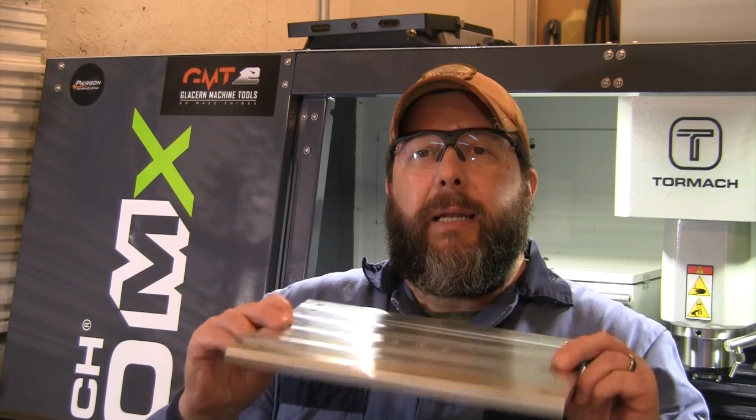Rather than trying to counterbore and drill and put all that through the 1.5 inch, I made up one pallet and I've got this half inch topper plate that I'm going to put on there. It's got dowel pins that align it, and it's got some bolts that hold it down in the corners.

What we're going to do is go through - I've got the bolt pattern for those knife slabs laid out, and all we're going to do is just punch some holes in here. We're going to flip this over on the pallet, counterbore those from the back, and then I should be able to bolt 4 of those handle slabs onto here and run that cycle to get these machined.

I only went with 4. I could have fit more than that on the pallet, but it takes a long time to finish all the contours around there, so 4 is a long enough cycle time. That's still going to save me time, give me a couple hours around the shop to work on things while it's running all those contours.

This operation for this is going to be a lot quicker than that. We're looking at about 4.5 minutes to drill the holes in the top side of this, flip it over, and about a minute or less to do the counterbores in the back side of this. This whole pallet, the rest of it's already ready to go, so it's only going to take us about 5 minutes to make this pallet.

Then we'll test fit, get our pieces bolted on here, and we'll start machining, running that pallet through one cycle to get those contours done and finish those off. Before we get into this, we'll take a quick look at the design in Fusion and make sure you understand exactly what I'm talking about for the holes on here. Pretty quick operation - we'll finish this topper plate, then go back to Fusion, take a look at exactly what we're doing with the handle slabs, and come down here and make some chips.

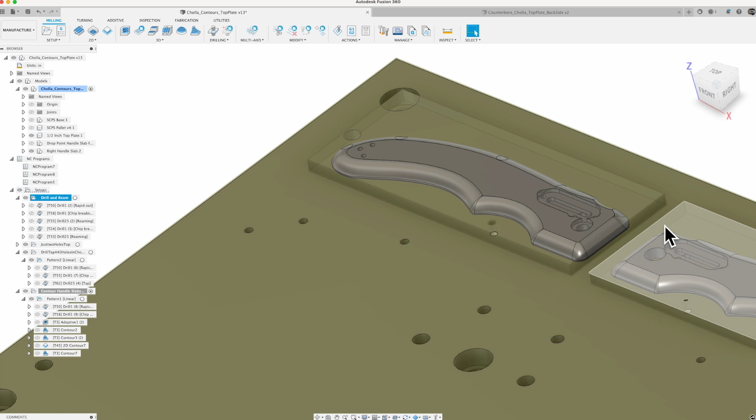After that, you can see where the handle slabs are actually going to fit on here, so we'll get those in place. These other 2 holes I added after, so you'll see where those fit into the design here in a little bit.

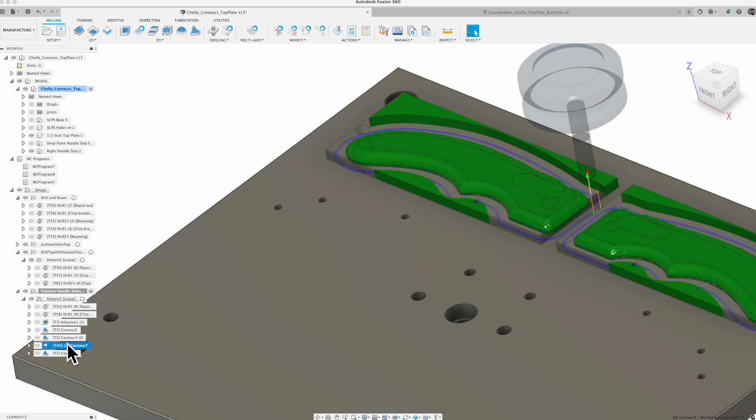But then we're going to go through and do the contours. We'll go around and do a little adaptive roughing around the outer edge, then a bit more on the contours, then clean up the profile, and finally do this very fine finish cut around all of the contours. I did a pattern on there across these 2 designs and then patterned that down. Unlike the drill and ream, where I just did both of them without a pattern, I did all of it in one place. So again, pretty simple pallet. That's the plan. Let's go down there and see how this goes, knocking it out.

All right, well, now that we've seen what we're making, here's that actual Pierson Pro Pallet. This is the 1.5 inch thick piece. You can see I didn't want to be trying to counter bore and bolt those little tiny pins right through this, so that's why I went with this top plate design.

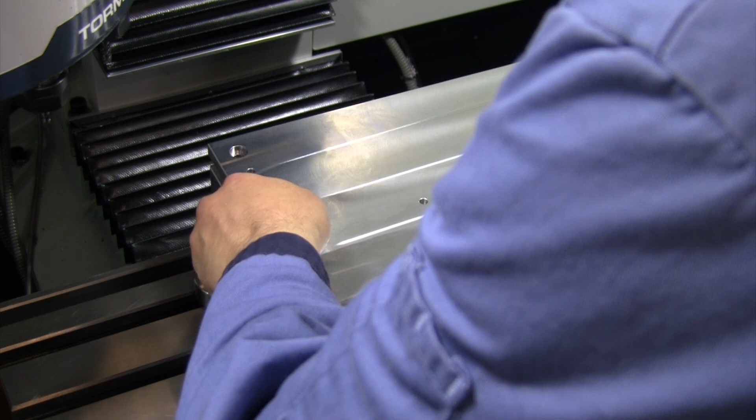And I made multiples of these top plates so I can use multiple different fixtures and holding, so it lines up on those dowel pins. I've got 6 of them on there. It's pretty good alignment. All right, we've got that down on there, and we've just got some stainless bolts here to get those locked in place.

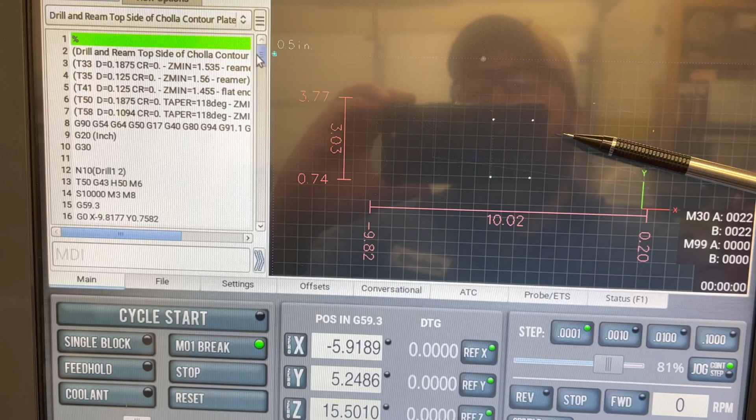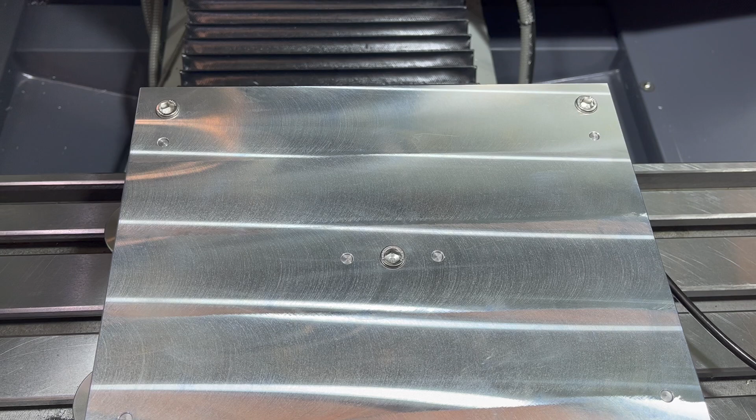All right, I actually had to spin my pallet around here one time. I forgot that I had marked these in the corner, so I made sure I got them oriented the right way. This is the first one of these that I am finally finishing, so make sure I get it on there the right way, get it bolted in place, and we'll be ready to move on and start our program.

All right, we've got our file loaded up in here. We can see a preview of what we're going to put on here for some holes. You can sort of see the other ones coming across there for the bolt holes, so we get enough for 2 sets, or 4 pieces altogether.

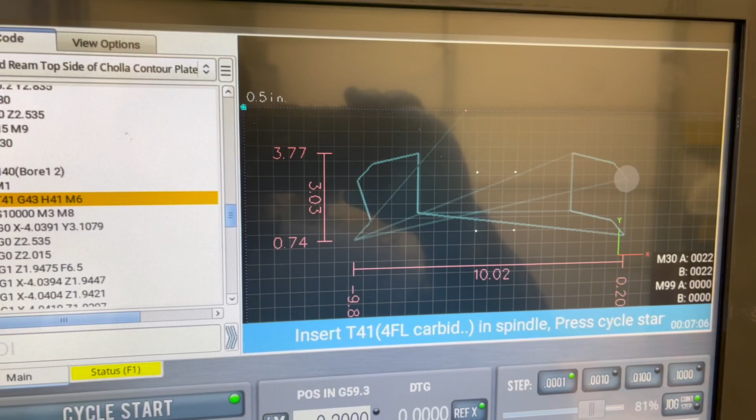I use the same single point of origin on here, so G59.3 is my work position for that pallet system. You can see that I've got this set up for G59.3 on that file for the program. It's only a few tools on this one. You saw that we got it all bolted in there. Like I say, it's only going to take about 4.5, 5 minutes to run this, so it should be a pretty quick cycle.

All right, well, I hadn't done that before. I actually did not keep track of my tools properly when I was loading up the automatic tool changer. I had 41 in there, and then I put in one of my drill bits and took out tool number 41, not realizing I took out a tool that I needed. So it just stopped the program and it's manually asking me to insert that. So I just put in the tool, it's gonna run.

I turned on the M01 cycle break so that when it goes to change the tool after that, since it has no place to store it, it's gonna ask me to remove it before it continues, but I went ahead and turned on that cycle break anyway. First time I've done that, just thought I'd drop that in the video, kind of interesting.

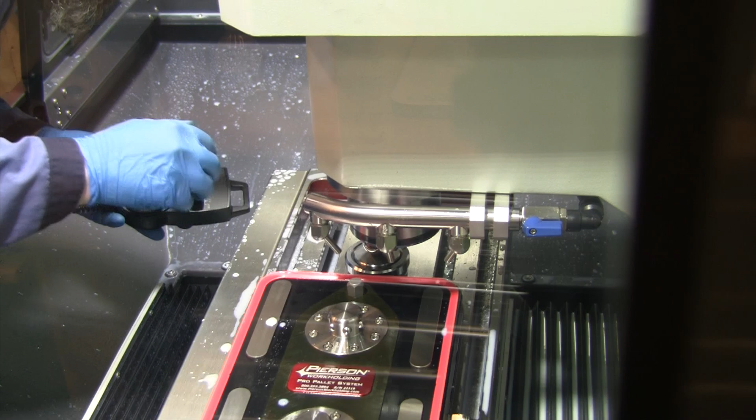All right, well, there's going to be a nice little reminder for me to look at for a long time on what I did there. So looking at it, the depth of cut, I'm going to go up and check in Fusion real quick, but I think I'm going down about 460, 470 maybe deep.

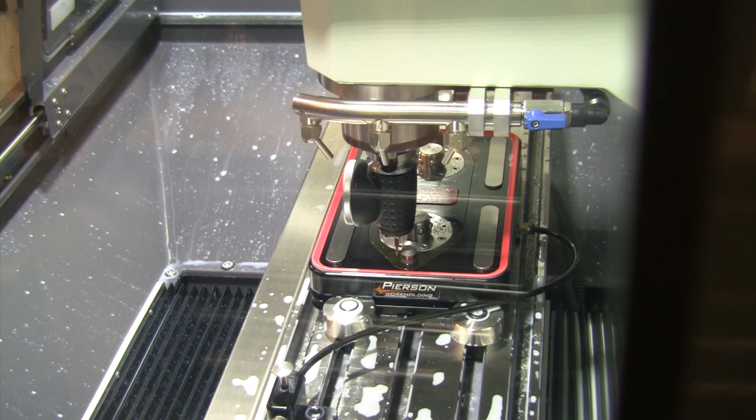I knew I didn't want to go through the plate, so I think I'm going about 460 deep, and that length of cut on that cutter is only 0.375 in the machine, so I probably had a collision when I ran the simulation and just didn't catch it. It's only 3/8, actually sticking out of the tool holder about 430, and I think I was going for about 460, so I've got them all stubbed up for doing titanium. So it didn't even break the cutter, it just ran the tool holder right into the top plate since it's just not sticking out far enough.

Length of cut issue, first time I've done that one too. I think that's my first real serious crash on this Tormach. I've had another one where I got a tap stuck, had a little bit of a bump somewhere along the way, but that's a pretty good crash right there. So, totally my fault.

Let me pop that plate off, or pop the pallet off. Let me put my probe in and check and make sure I didn't knock anything out of alignment as the machine reset. And you know, I'm just going to end up using that pallet because it'll still work. Plates will still sit on top of there while I do my contours. There'll be plenty of surface area to keep it lined up, and I'll keep that as a nice little reminder of check and double check these things.

They're pretty unforgiving when you make a mistake. All right, so after a crash, first thing, go through and make sure you reset your machine. I start with resetting my tool height and then reset my probe on there before I actually go probe anything.

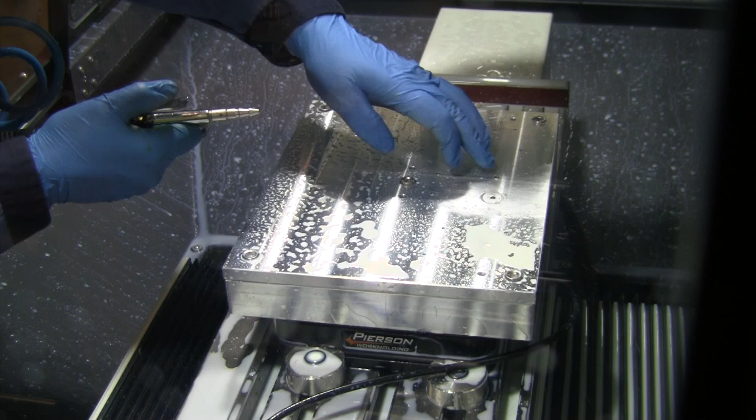While I had it over there, I just went ahead and reset that tool height. Checked my height here, really happy with it, was only off by about 4/10. And then I went through and checked the setup on the rest of the Pierson Pro Pallet system and was maybe again off by a couple of tenths on that pin. Moved it down to the other one, it was still perfectly square, it was all aligned. So all that checked out fine, ready to move on.

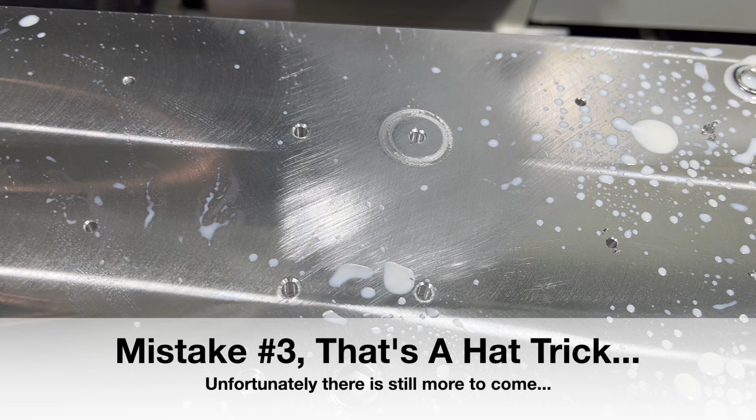All right, well, I got in there with some emery cloth and a file, cleaned that off so that it's flat, so when I flip it over it'll sit flat. Again, it'll still work for what I need it for. Didn't waste a pallet, and pretty surprised - the machine was only off by 4/10 in Z, and it was off maybe about 4/10 on the X-axis. Same thing on Y, so I think that's almost within the half thou of the machine's repeatability, so don't really think anything moved.

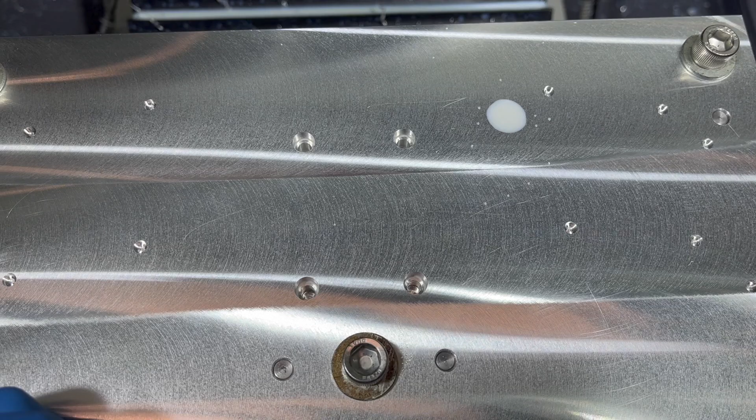It was still nice and square on there, but I went ahead, reset everything, reset the tool height. I've got tool number 41 sticking out about an extra 200 thou, so we should be able to go in there and finish boring these holes and finish this project. So much for a 4.5 minute cycle time, but good learning as always. All right, let's go ahead and hit run and knock out the top side of this and flip it over.

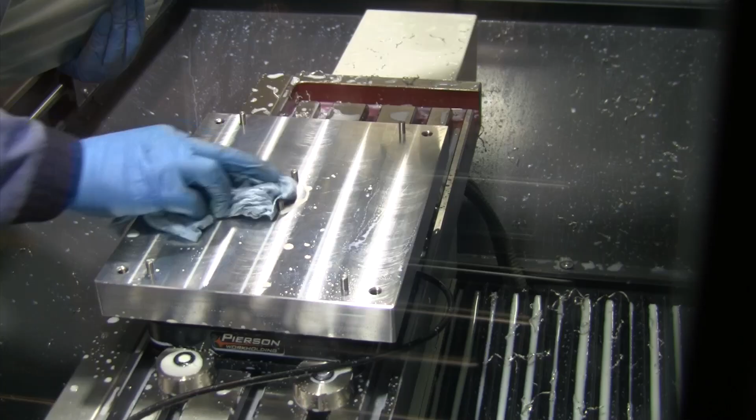All right, boy, when you're off, you're off. So first a crash because the tool's not sticking out far enough. I pulled the tool out farther, but the length of cut on this tool is still only 3/8 of an inch, and I'm trying to go 450 thou deep with it. After it rough bored that hole and tried to go in for the finish cut, it wasn't cutting all the way at the top. So I counterbored it, we're gonna punch a reamer in there. It's aluminum, it'll get away with it, clean it up. But man, I missed a tool on the ATC, I missed a depth, crashed, and now I didn't have a good program.

Yeah, I think I didn't take programming this jig plate very seriously, and oh man, just so much learning on this. That's the time you get dangerous, you've been running it for a while and you think you almost know what you're doing, and that's when you're gonna make some serious mistakes. So I think I just learned to slow back down and do some better double checking.

All right, let's get this reamer in here. Let's finish reaming these last 4 holes and get this flipped over and counterbored.

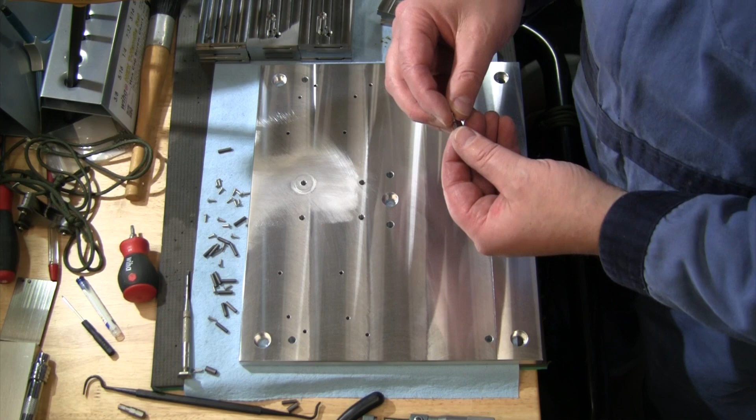Call it a day. All right, and just to confirm what happens, I had that M01 cycle brake on, so it stopped. I removed the tool, so I had already removed 41. I hit go, and after I hit cycle start, then it tried to go again, and now it's telling me to remove tool 41. I tried to set that to 0, but it was in the middle of a program, so it would not let me change that to 0. So I've now removed it, and now it's telling me to hit cycle start. So again, manual tool change in the middle of your operation just runs pretty smooth. First time I've had to deal with that.

All right, so there it is. Top side is complete, with war wounds and all. So I've got these holes, I just use the hand reamer, ream the top of those, make sure there's no burr. We'll flip this over, it'll sit flat.

I was just pulling the bolts out while I was waiting for the compressor to stop. So again, that should have been a really, really simple op, just drilling a couple holes, reaming them in there, and we made that more complicated than it needs to be. Let's get this flipped over, let's counterbore some holes in there and call it a wrap.

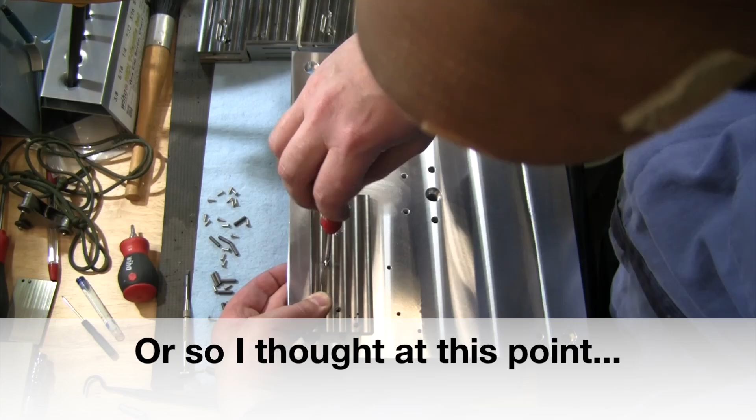All right, we're gonna get ready to do this backside. So this time I need tools 45, 46, and 50. Let's go double check that we have all of those. So I have 45, 46, and 50. All right, I have all 3 tools that I need.

I'm still on 59.3. I do in fact have the counterbore, the bottom side of the contour plate. I've got my new file, and 45, 46, 50. We should be good, only 3 ops. These tools should all be sticking out far enough. Plate's bolted on there the other way up. I've checked the tool path and we should have plenty of clearance over top of these bolts, even though they stick up further. Since there's no counterbore on this side, I think we're good. Let's hope for a smooth op.

Once again, when you're off, you are off. I'm good on my 4 3/16 holes here in the middle, I seem to have plenty of depth, plenty of clearance. I did not break through on these 1/8 holes, so I didn't come through far enough from the other side. I'm right on this side, I'm counterbored in there 66 thou. That's enough to get the 50 thou screw head down underneath.

So I either set the depth wrong on the two of these, and I used the shallower depth for the holes that needed to be deeper, and I used the deeper depth for the holes that could have been shallower, or I've got something else going on. So let me flip it over, let's see how deep I am actually in there on the other side, and then we'll have to go adjust the program, and we're going to have to rerun it on the top side and get those holes the rest of the way in there. All right, let's flip it over and see what's going on.

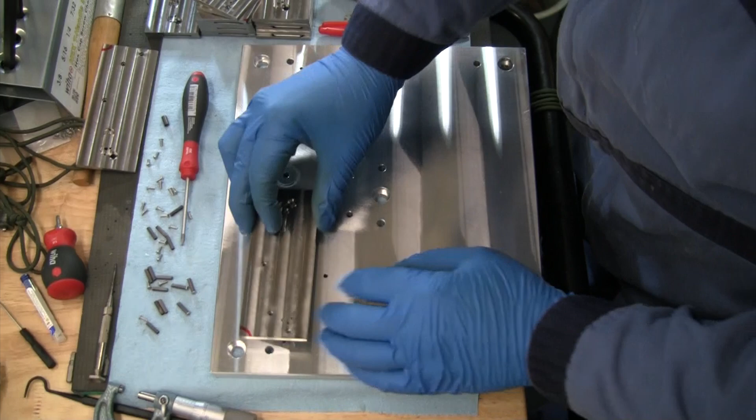Because I'm coming 200 thou deep on the other side to counterbore, and these holes I want it to go within about 5 thou. I wanted to go 480 deep, and these holes I was pretty much touching on the backside. There was just a thin little bit of material left. I could see it pushed up a little bit, so I clearly went deep on these ones instead of these ones. Let me go up, fix the program.

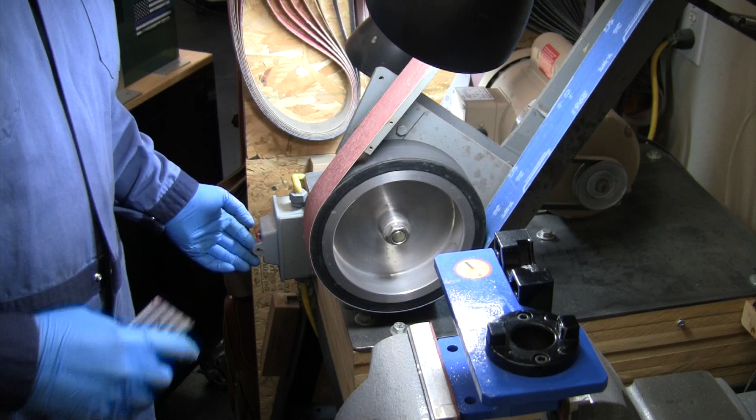Let's come back and rerun the top side of these holes, and then, my goodness, let's wrap up this 4.5 minute project after nearly an hour.

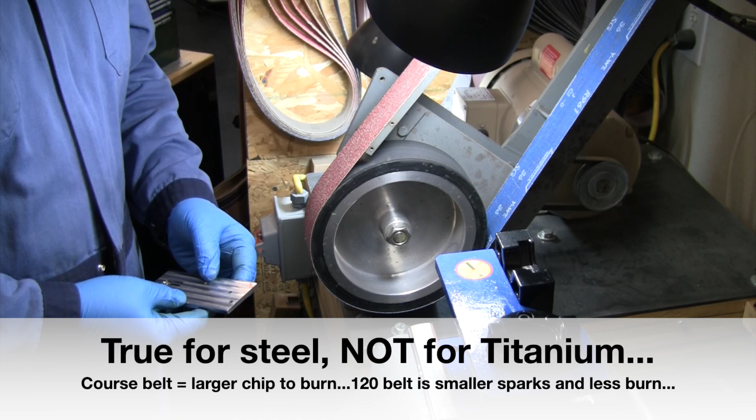All right, so the problem wasn't exactly what I thought. I went up and looked in Fusion, and I had actually set the depth to the hole bottom and then backed off 10 thou to make sure I didn't punch through. But because there was a counterbore on the backside, the hole bottom was to the top of the counterbore. So I backed off 10 thou, backed off 15 thou for the reamer. So we went ahead, reset that, came down, re-drilled, reamed those holes, and we're good.

All right, well, after that less than stellar performance, I'm ready to call it a day. So we're just going to do a quick test fit. We're going to make sure that after all of those failed attempts and retries on this, we're going to just verify that it does, in fact, line up and hold our plates on there. And then we'll call it a day, and we'll come back and actually machine this pallet tomorrow.

Or at least I'm going to call it a day. I think I've had enough for today.

The fit on those is still not bad, even though I reamed them twice.

Let's see, I need one of these to fit over there. I'll go with the set that I've already flattened off, deburred the bottom. There's the one I need. All right, well, at least I got that part right.

There we go. That tightens down. That one still fits in that hole. And I know it covers up that hole a little bit, so I do know that I'm going to need to get in there with a grinder real quick, and I'm just going to need to knock the corner off of a couple of these. Just wasn't avoidable, even if I get in here for these other ones.

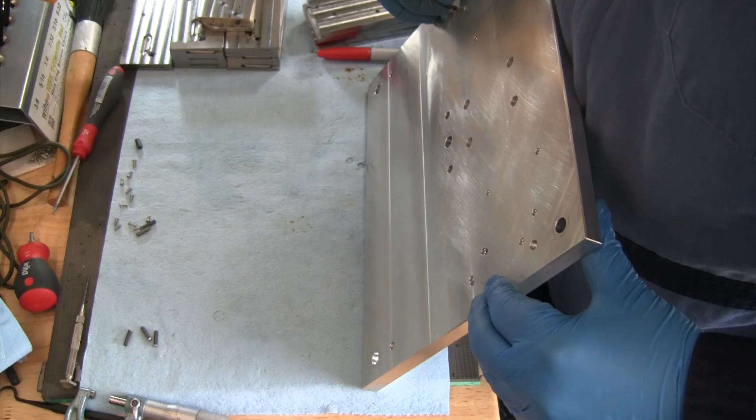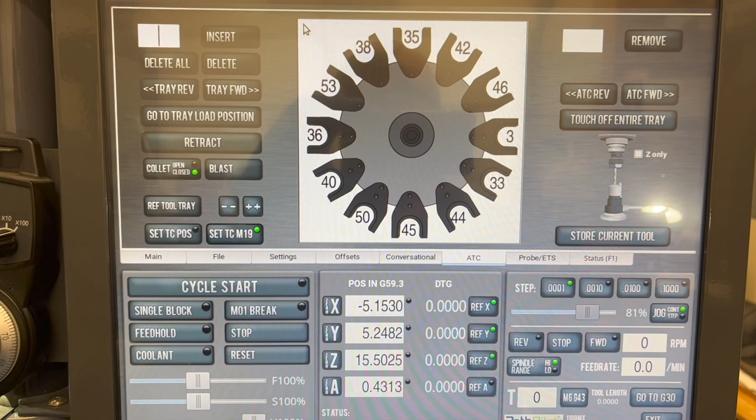But anyway, I've gone up there. If I need to remake the whole plate, I will, but it looks like they're off by pretty much a full hole. So I think I'm going to have enough material around there that it's going to hold well enough and it's not going to weaken over time.

Let's go ahead and put in those 2 holes right now. If it looks like it's going to work and has enough material, then we'll go with it. If we need to remake this whole plate, I went ahead and tweaked the program and adjusted how we bore these holes.

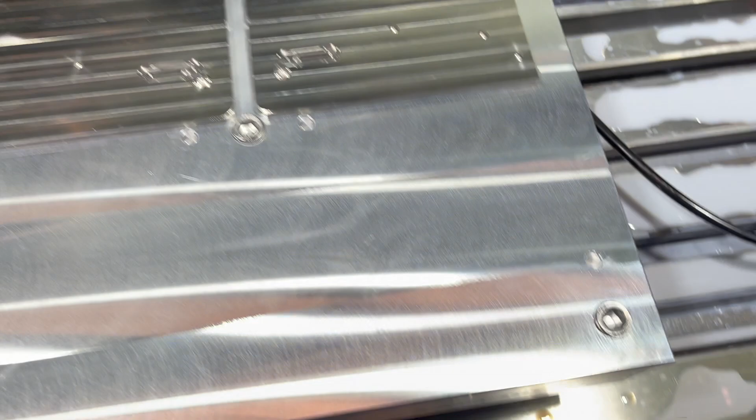So if I need to remake the whole thing, we can definitely do that. But I do think it's gonna work. Let's get this back in there. I've got the program uploaded, tools are already in there. We're just gonna drill, ream those 2 holes, flip it over, counterbore those 2 holes, and see if we can get to the next step in this evolution. All right, let's go.

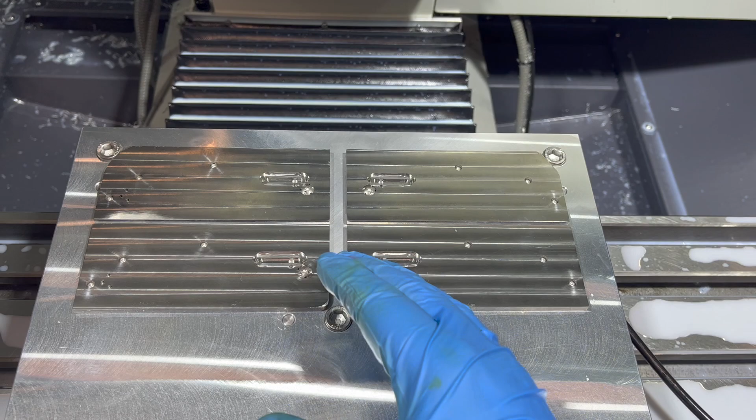Well, that is far enough over that we've got enough surface area contact. Should get no problem with alignment on those pins, so I don't think there's any point in redoing it and sacrificing the whole plate. Now I get a crash scar and another misprogrammed scar that I get to look at every time I look at this pallet. Sure, that'll just keep me humble.

All right, let's flip this over. Let's knock out the other side and move on to our next step.

All right, we got our extra holes counterbored in there on the back side. Gave that just a quick rub down to make sure there's no burrs sticking up on any of those holes. When we flip it over, it'll go down flat.

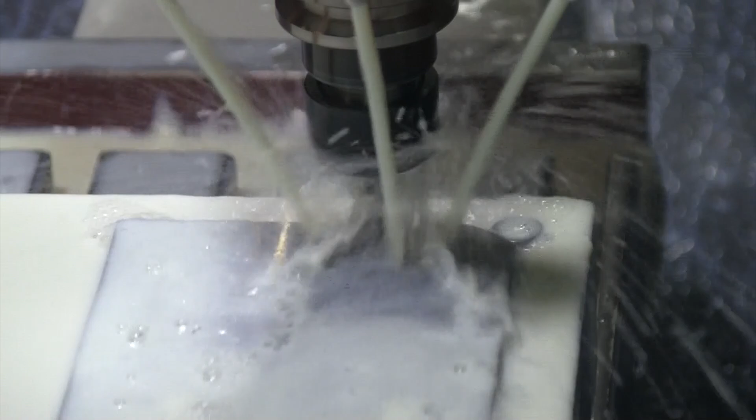Let's get our pieces bolted on there and run this, what should be the long cycle. This should have been 5 minutes so far into this video, and I'm hours into it, and we haven't even got to the part that's gonna run for 5.5 hours to finish contours. Let's get to that part now.

All right, well now we'll get back to where we were. We got this ready to go. So I'm gonna get in here and put a really coarse belt on the grinder, and knock off a couple of the corners of these here.

Got these laid out where I need to be. So I need to take off that corner right there. And this is where I was marking this last one to take off this last little corner right there. And then we'll be ready to go.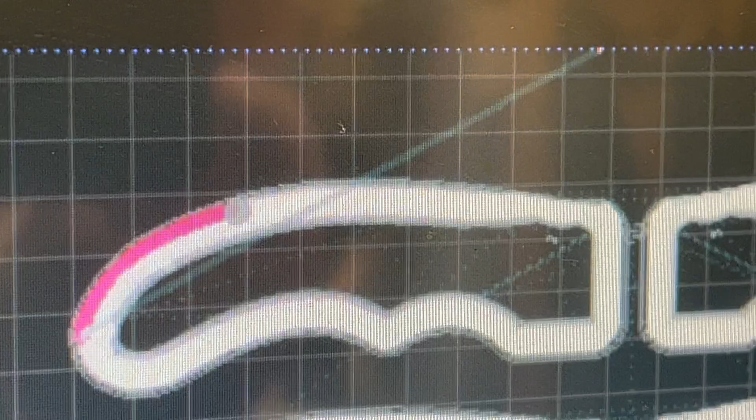So like I said, I'm just gonna put a 30 grit belt on the grinder, quickly knock those off, get rid of any burred edge. I'm gonna stay plenty far enough away from the design, same thing off in this corner back here. I've got a long way to go, so I'm not gonna get anywhere near the design, and we'll just knock those off to make sure we can bolt this down.

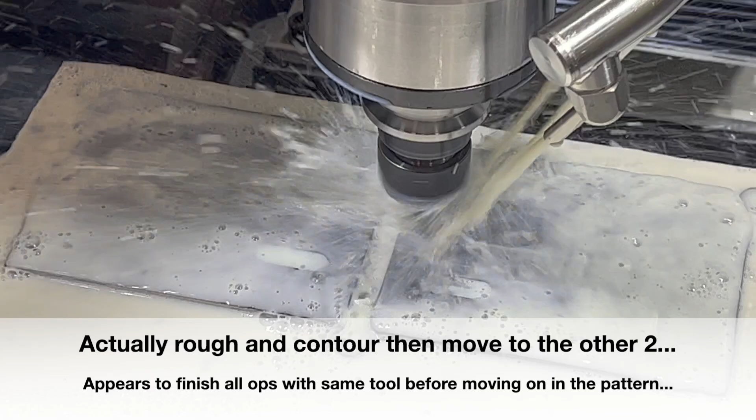Now, titanium shavings are very flammable. I don't like to grind a lot of titanium. With a really coarse belt, we should get more shavings than sparks, but I will make sure I sweep up my shavings after they cool down and make sure I get those thrown away. I've got a bucket of water here, but I don't think we're grinding enough that it should be a factor today. Keep that in mind if you're ever grinding titanium, the little shavings that build up are definitely very flammable.

So much for not much in the way of sparks. Even with this coarse belt, it makes lots of sparks. In fact, I think it may be worse.

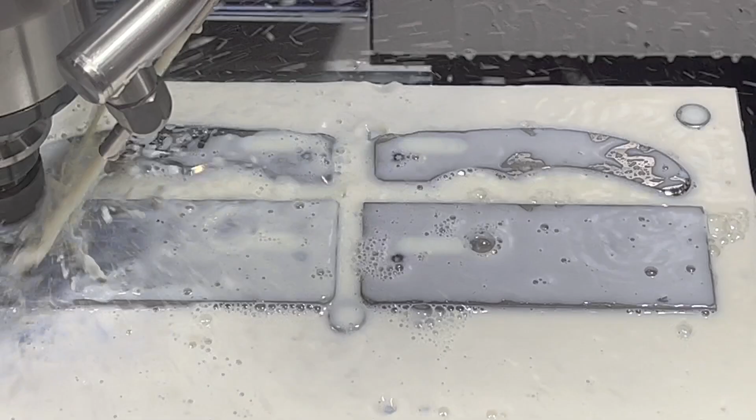So putting all this hardware together the first time to get this first set of 4 bolted on the pallet took a few minutes. Had to put a screw all the way in one end, just getting all these pieces put in from the back side of the pallet. Took a few extra minutes, but by the time I did the rest of the runs on this, I think I got it down to about 5 or 6 minutes. So 5 or 6 minutes to change over parts on a pallet for a 5.5 hour operation seems like a pretty good trade-off.

And again, I really like using the native hardware. It's what I already have on hand to bolt these knives together. So really easy to use this and get these things bolted onto the pallet and get all these contours done. Excited to get this on the Pro Pallet system and in the Tormach. Ready to go, back in the Tormach.

All right, so a big moment of truth. Let's go through this by the numbers this time to try not to have the errors like last time. Last time we missed out on a tool. This time it's only 2 tools, tool number 3 and tool number 45. I have both of those loaded. We are still on...

G59.3, our single point of origin for these pallets. So we're good there, got our program loaded. It looks like we're making contours on 4 handles, oriented how we've got them on the plate. And this says we're at G59.3, only 2 tools, T3 and T45.

We confirmed we have those set up. We have our plate loaded in here, got our 4 plates on. We're oriented, we're bolted down. Pallet system's locked in place. This program should run smoother.

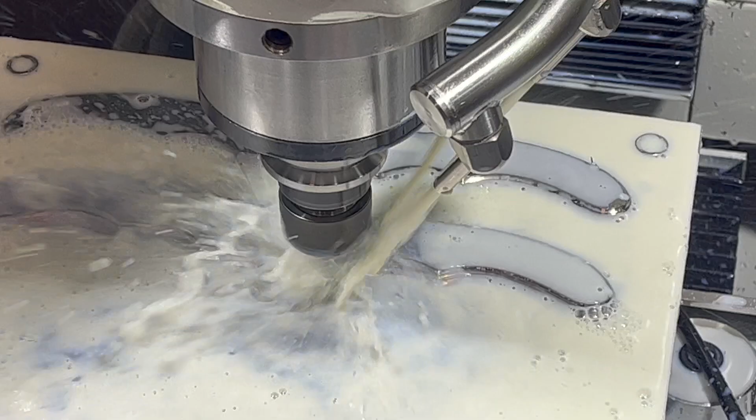I copied this program from when I was doing these individually on 1 jig plate, and I just made that program a template. I brought it over, and I did change a couple things. Instead of finishing with a 1/8 bull nose, I'm finishing with a 1/4 inch bull nose. I'm trying to see if that'll give me a little bit better finish on the same step over. So other than changing that, I really left most of the parameters the same for roughing and the adaptive. Hopefully it goes through here without issues.

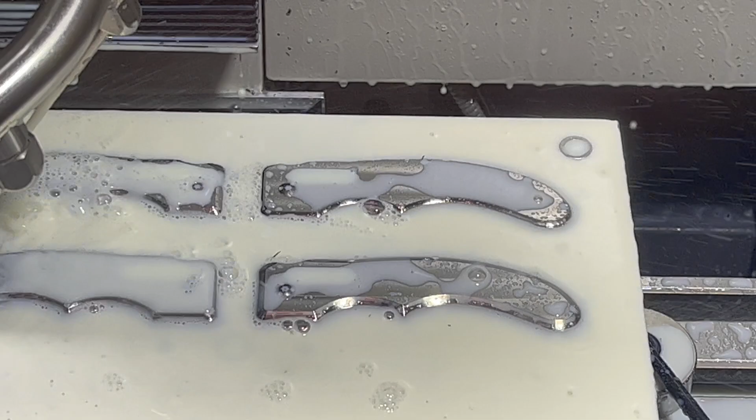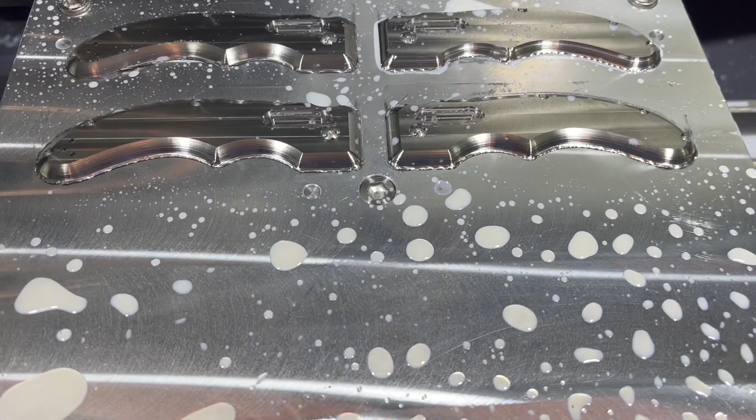Now, when I was doing this before with one on the breakthrough, it stays connected in one little piece, and with the round nose connecting up with where we just machined through from the backside where we put the chamfer on, it doesn't fling any material around. I let it pause on the tool change before it goes around the contour, and that piece just pulls off. There's just a little thin tinfoil thickness kind of film holding it in place. So none of those depths should have changed, but my only concern is if it breaks through and grabs hold of the leftover piece and tosses it out of the way, that's not going to be ideal. But again, that wasn't happening when I was doing 1.

I think that should still be good here as we've got it set up to do 4. Hopefully we have a much better experience with this program than we had with the other one. Let's go ahead and run it and see how she goes.

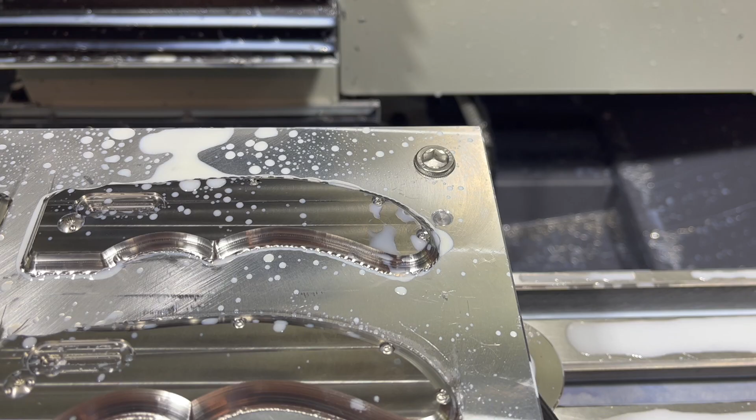Well, we are off to a promising start here. Seems to be nice and rigid on this pallet. Now it's just going to run for a long time getting these 4 done. That's that adaptive roughing path it's taken right there.

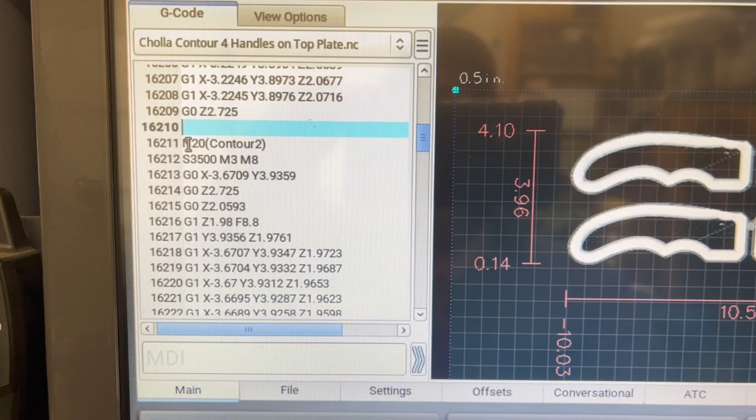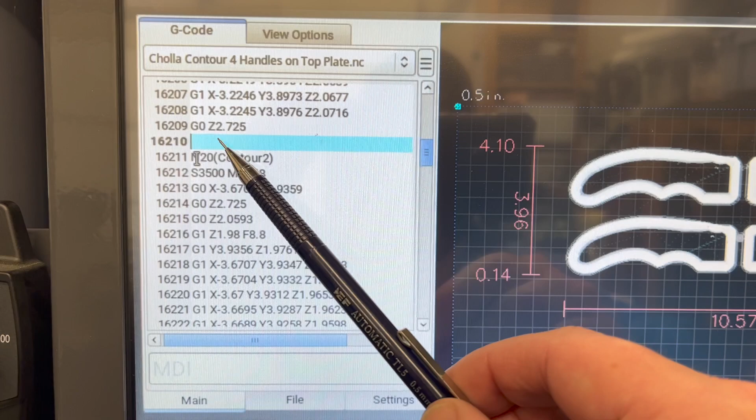One thing I was worried about is in fact what happened. I think in my other program before, I had a tool change in there that switched from that 1/4 inch over to the 1/8, and that's when I got in there to remove the pieces. So you can see this piece over here is just loose. I can probably get these two pieces off of there, but I didn't have a tool change. I didn't have the changeover where I was able to get rid of those. So it went in there and continued roughing. You can see this piece, it broke free, it moved, and it jammed the tool in there.

So of course, we toasted that cutter up pretty well, busted the end of that all up. I need to get a new cutter on there, reset the tool height, and I'm going to have to figure out how to get in there with some kind of a pause between these operations to stop that from happening. All right, gonna have to think through how to tweak the program to fix that.

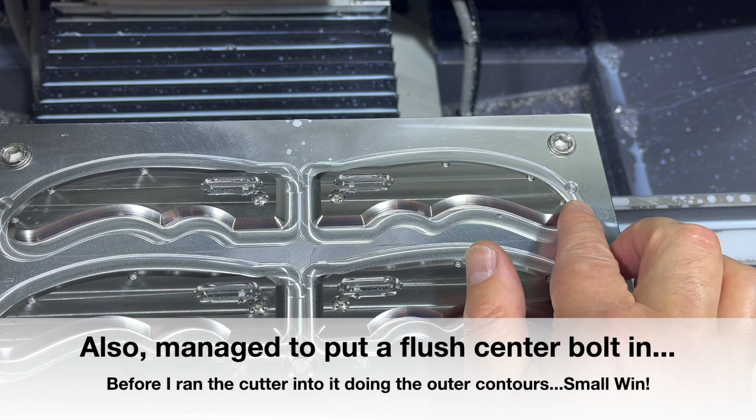All right, so I got the pieces removed from there pretty easy. They're really connected up on this backside there. They've got a little piece where they connect. Got those popped off of there.

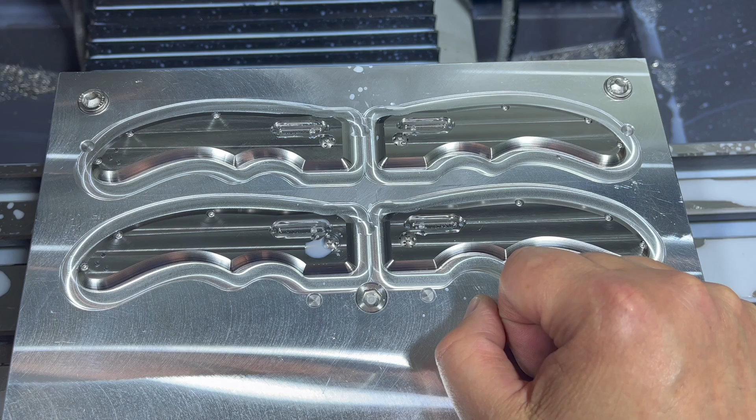I'm thinking down here on the bottom there's enough clearance. I think it's because it hit this other piece and couldn't just bounce around in there like it used to. So I don't think I'm gonna have a problem down here on these two bottom ones. If that bottom piece comes free, it can just push it out of the way. It's not gonna hit anything or get jammed.

So I just need to figure out how to get a pause built in there where I am. I know what line of code I'm at, so I can play with that for after. But let's go ahead and get this back in and let's continue running the program.

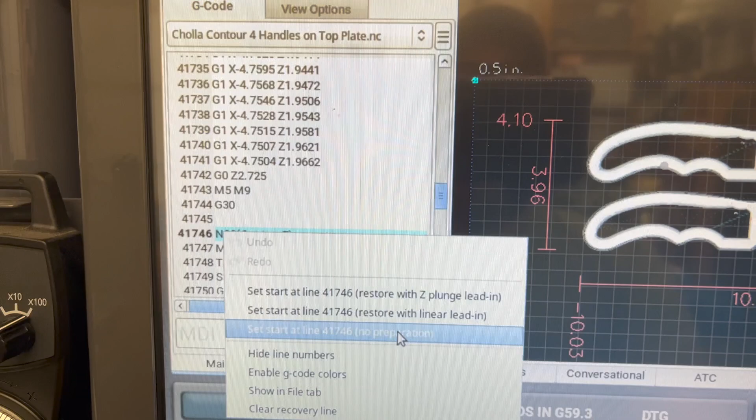All right, so I gotta say I'm pretty confused. I took a picture of the line of code I was on when the tool broke, and I actually backed up almost 100 lines of code, about 90 lines when I restarted, and it went back over to that top left handle slab, even though the cutter broke on the top right handle slab. It went up there and it basically just kept working on that, and that's where it still was when it went through the line of code where the tool broke.

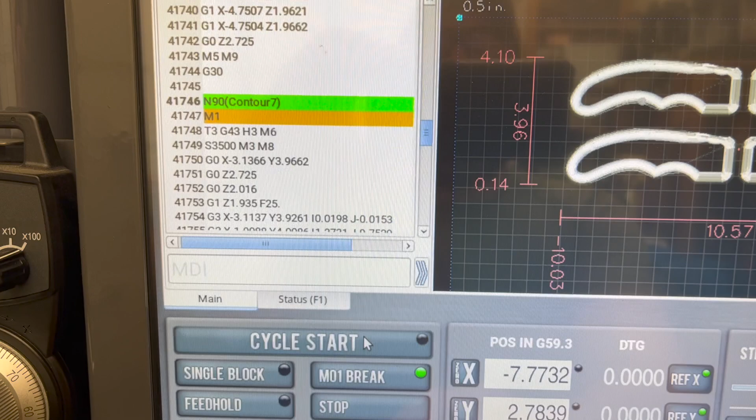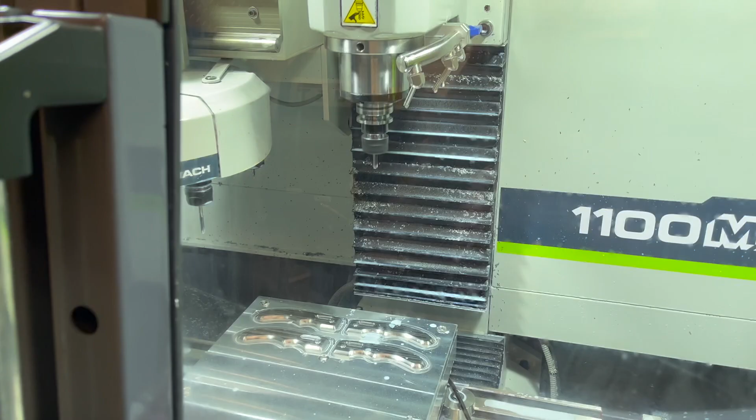So not sure if I did something wrong on the restart, and then it just did a whole bunch of work, went around, finished that, never went back to that top right, and now it's going down here to rough out the other two. So interesting.

I'm going to be curious to see what happens, but it doesn't seem to have done what I would have expected. Never went back to that other piece. So, interesting. We'll see what happens as we continue on in this operation.

All right, well, we got the material cleared out of there. I need to come up with a better way to do that, come up with a better way to pause the machine, but we got it cleared. Only broke one tool so far on this whole cycle. I think we should be good. It should be a pretty clear program after this.

Make sure I've got the profile set up correctly on those. And the only thing I'm still baffled on is, we'll see if it finally goes back and does that top right side piece and finishes up the contours on that. We'll kind of take a look at what all the contours look like before it goes in there and does the finish cut on them. Make sure they're all the same. So far, I think we're going to be smooth sailing for the rest of this.

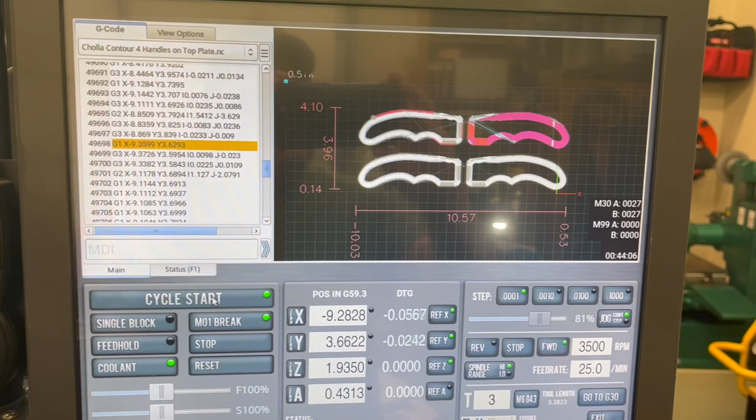All right, well, it's over there doing the rest of the roughing off of that bottom left. On the bottom right, it definitely went around and took some additional cuts off of there. That one has a different contour on it right now than the top right. So since it's mirrored the pattern, you would think it would do the bottom similar to how it did the top, which means I don't think it's going to go back and pick up that one on the top right.

So I'm still just really confused. I've double, triple checked the picture I took where the code stopped, where the tool broke, and versus where I restarted it, and just no idea why it appears to not have started in the right place. We'll see.

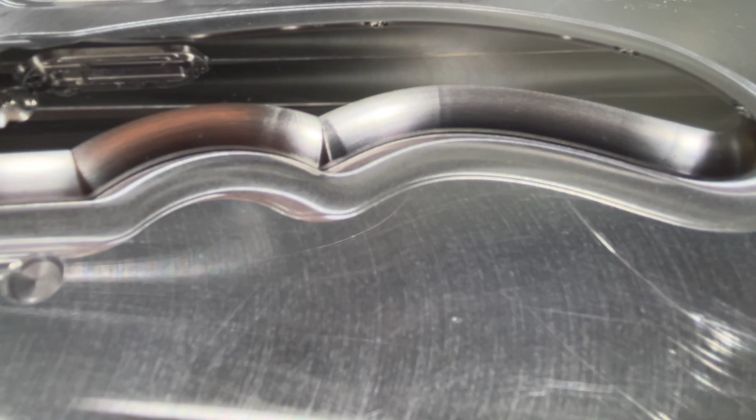All right, well, I guess my confusion wasn't unwarranted because here's the profile I have on 3 of these. You can really see it if you kind of look up at the contour off of the screws back there. It definitely rounds into the top, and then we go back to this one and it's got this definitive step right there. So somehow after I broke the tool, I did not start in the right place.

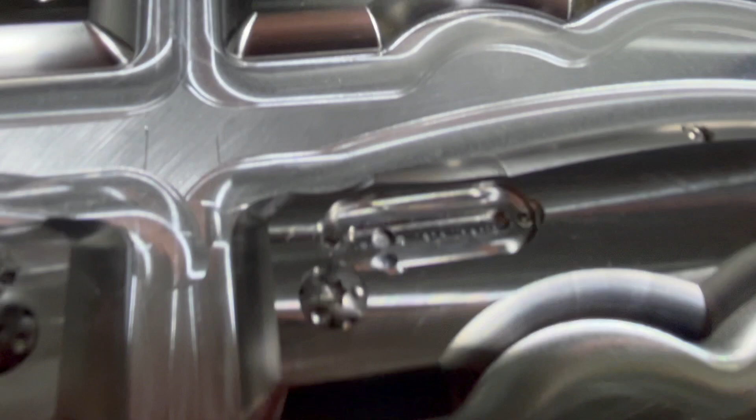I really want that finish cut to work. So what I'm gonna do is, it's about to change tools. It's gonna come around here and profile these parts.

I'm gonna go ahead and let it run the profile on these. I'll set the tool stop again. Then once it goes back to this other tool, before I run the finish cuts around here, I'm gonna go start my program. At the beginning, I'm gonna see if I can find exactly where the program starts after it does the adaptive roughing, and I'm going to try to let it run after the adaptive roughing. It's probably going to run around this part over here as well.

The list of errors continues on this overall video and project, but man, tons of learning. I wish I could understand better where I'm making some of these mistakes. Most of them I figured out. The only parts I haven't figured out is how I got those two holes wrong, and I can't figure out how I started in the wrong place. But we will fix it before we do a finish cut.

All right, it's going in there doing a cut around the contours. I think there was a little bit of extra material on that one over there on the top right because it took a little more off of the first pass. This one should take a good cut off the second pass and finish the profile on there.

There we go. All right, we'll get the profile on all 4 of these done, and then I got to go back and finish the roughing cut on that first top right.

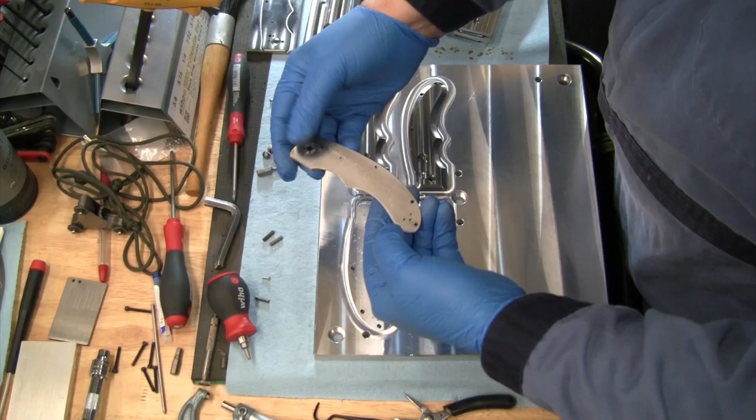All right, I think I found where the adaptive roughing ends and the first contour starts. So hopefully I'm going to start at this contour, that is further back than where I started last time. Last time I started at the line of code 17,500 something. So hopefully this will go finish the contours around this piece.

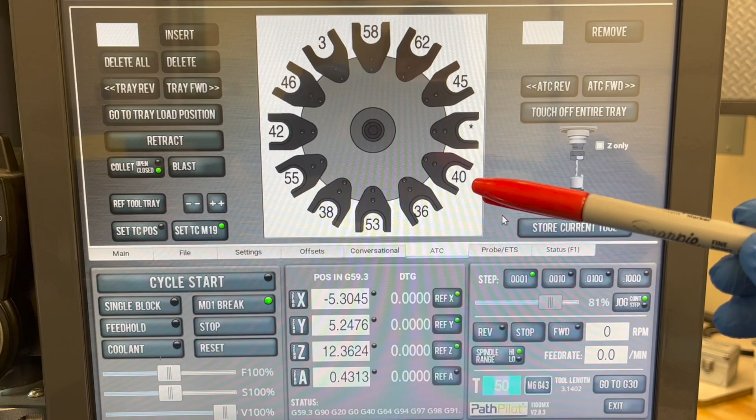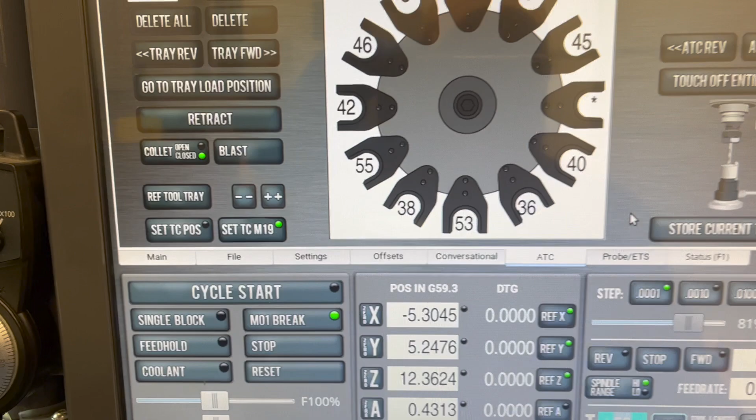And once I see it starting the contours on this piece, I can stop and pick up where we left off after doing the profiles. Let's see what happens. Okay, well, it's definitely on the right piece. It went in there, it started pretty clean. Not cutting anything at the moment, but this is probably right around where it would have come around and broke the tool.

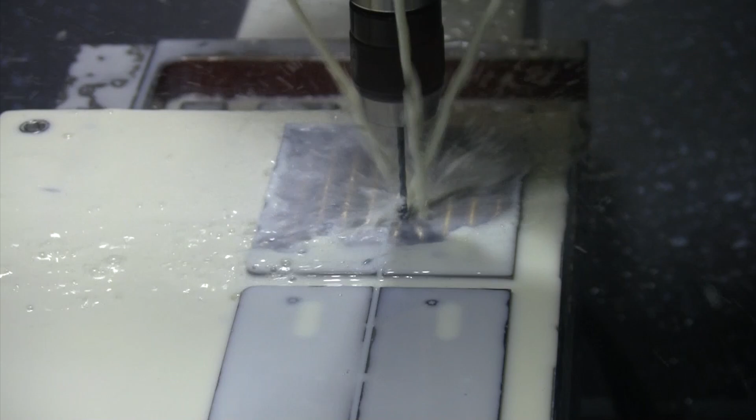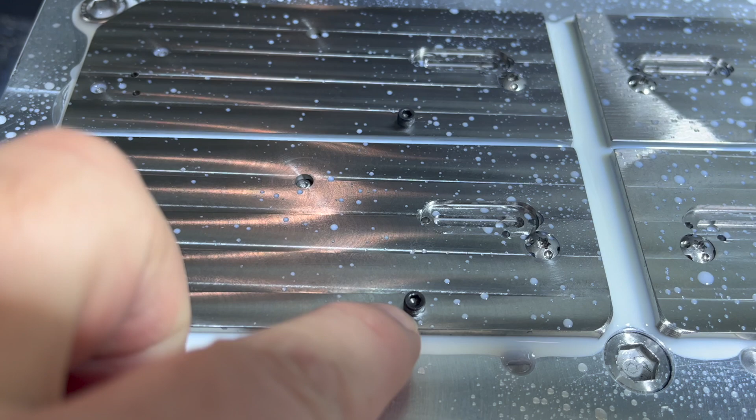So here's my 500 lines of code that should clean it up, and then we'll be ready to take our finish cuts. Half the mystery solved. We'll cut the rest of it. Just no idea how I got that to happen.

All right, we've got it caught up. We're ready for the finish cut. We went in there and we got the rest of that contour off of that one. Actually went back and checked my notes, and it was line 18,755 where I started last time, so more like 1,500 lines of code that I missed. Not sure how the E-stop, just from breaking a tool, impacted that. Don't have to solve every mystery, I guess, but we were able to fix that, got it caught up.

Now we're ready to take the finish cut. Nothing too exciting. I'll get a little bit of the video, but it's just gonna go around in circles, taking the last 10 thou off of everything around those contours. So it's just gonna make hundreds and hundreds of laps to clean that up and finish those. We'll come back and take a look at it when it's all finished.

All right, so now we're back to finish it off. This is where it finished the profiling. So this contour, this is our last set of contours for that finish cut. So I'm just gonna go in there and right click on that line.

And say start at line, no preparation. And because the next line is an M01 cycle break and I've got the cycle break on, it's gonna prompt me to hit it again. So right now I need to hit cycle start. And then it's gonna prompt me immediately for another cycle start, and it already has the correct tool in there, so it should kick off after that.

Stay tuned. All right, we are nearing the finish line here. Just about have this pallet complete. Should wrap up here in just another lap or two.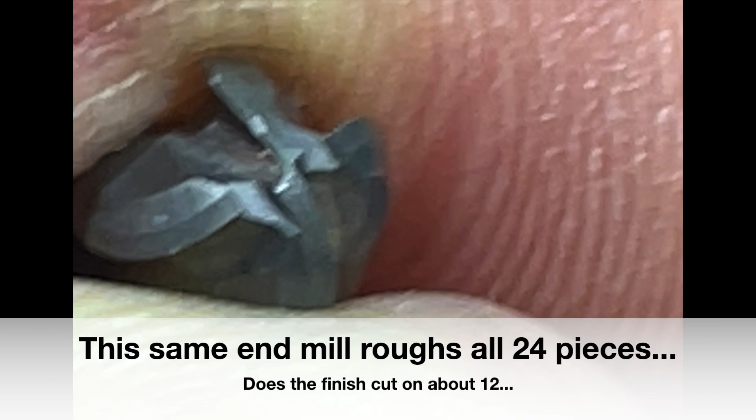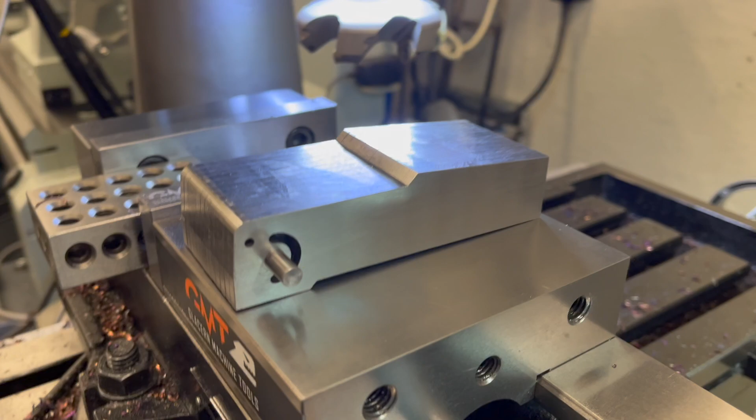Don't have a good cycle time on this one. We're sitting at 2 hours and 53 minutes just for this last finish round for the profiles.

But I'll run this again. I'll get a better total cycle time, hopefully when we don't have a tool breakage and a crazy restart, and all those other issues we faced on this one.

But all in all, even with a little bit of craziness, still looks like we're going to get some good product off of here. Take a look here in just a moment.

Well, there we are, cycle is complete, and I think we're getting a pretty good finish off of there. I do think I'm getting a better finish with that quarter inch ball end mill instead of the eighth inch that I was finishing these with before.

So it's looking pretty nice in there. Got all 4 of those done. And my plan is I'm going to drill and tap a hole right here in all 4 places.

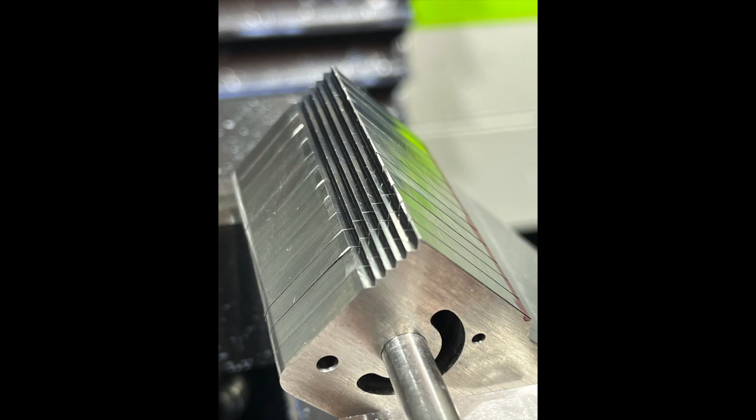Just drill and tap that 4-40, and then I'm going to make part of my initial program when I bolt these on -- drill a clearance hole in there, and then I'll just put a 4-40 screw in there that should hold this piece of material in place.

So once I punch through, I shouldn't have the problem of it moving and wanting to grab on that quarter inch end mill and breaking it. So that's what we're going to try next time around.

So first off, we're just going to go ahead and drill and tap the plate, and then I'm going to get my next 4 mounted on here, and we will run another cycle, and hopefully it'll run all the way through from start to finish.

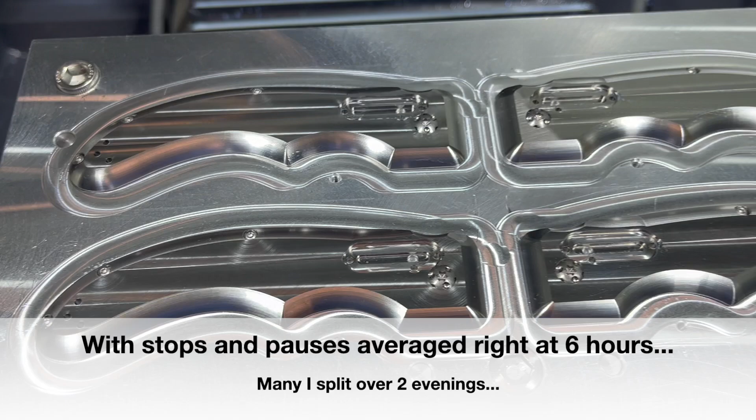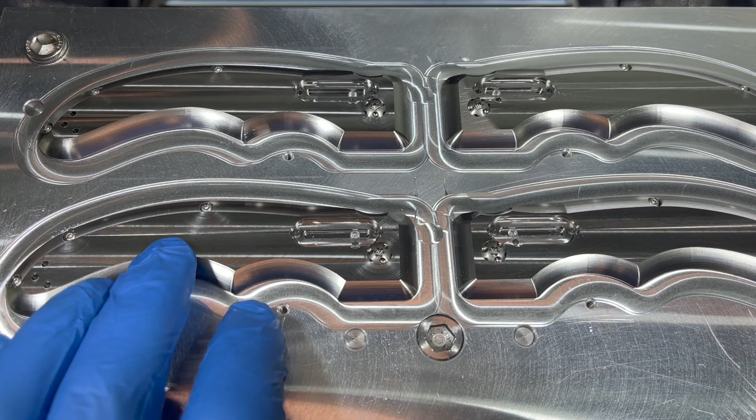That's the plan. But success -- I know, a little bit of an adventure to get here, but all in all, we're still using the same plate that I started with. We did get product out of it, so even though this has been my craziest, worst CNC project so far to date, we're still going to get product out of it at the end, so I guess I can survive and live with that.

All right, let's go ahead and get some holes drilled and tapped in here. Let's get our next set going. We'll drill, lock those in place, and make sure we get a full run cycle time without any issues next time around. That's the goal.

All right, let's see if we can do this first try. We need to get 4 holes drilled and tapped in there to be able to hold that stock in place and keep tools from breaking. All right, this should be super quick.

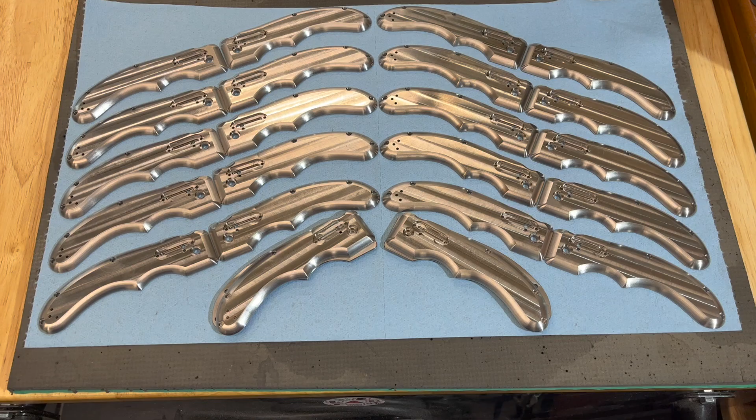We need tool number 50, which is at the spindle, 55 and 62. There's 62, there's 55 over there. So 3 tools, gonna take a minute and a half just to go in there and drill and tap these 4 holes.

I'm on G59.3. Got my file loaded in there, just drill and tap 4-40 holes in the plate.

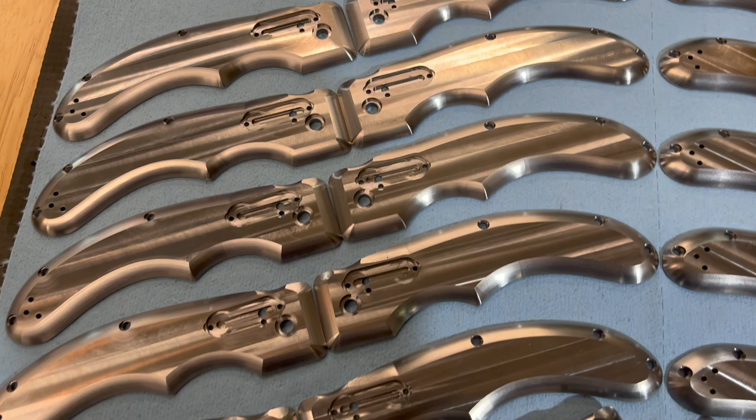So got our plate back in there. All right, minute and a half, let's knock it out. All right, well, that was it. Now we got 4 little holes in there to screw to.

I'm just gonna touch those up with a hand tap. We'll get our next set of 4 bolted on here, run a cycle.

All right, well, we've got a little screw in there this time. Should hold that extra stock, keep that from being able to flex and move around when we come around there and before it disconnects. Still got the tool brake on, so before it goes around and does the contours, just take that out, snap those pieces off like we did before, and then let it finish its work. Hopefully this saves breaking another cutter today.

All right, well, it seems to be in those problem spots now. That material is barely connected. This is where it's going to have trouble.

Piece is vibrating. It seems to be okay. I think it held up in there. So now I think it's moving on to its upper level.